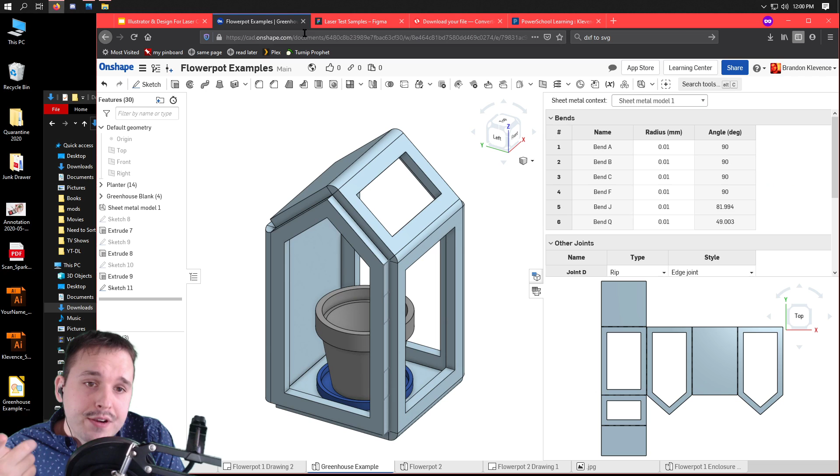Export your DXF or DWG and convert it. My first website that I used didn't work, but I'm going to check in on that. Convertio.co seemed to work just now.

And if I pop this back up here, what you should be able to do is once you have it imported, or you drag it in, you can ungroup it. Now let's see right here. You should start to see your actual line work, your actual drawing in there. And you want to go through and ungroup it again.

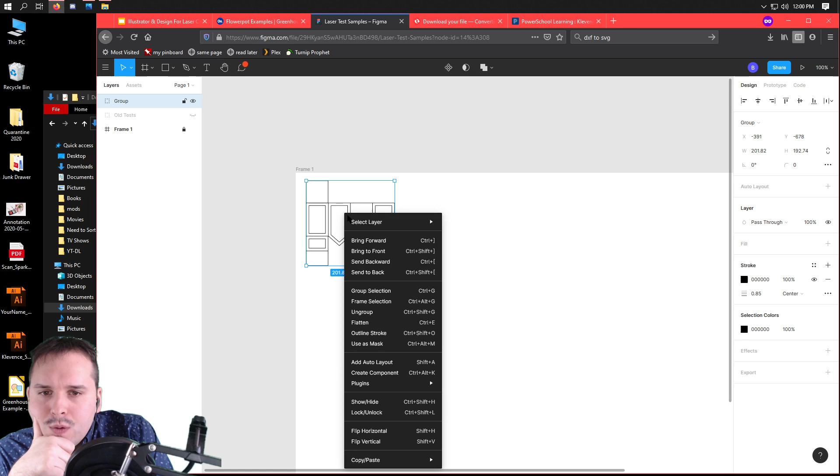You're going to get a bunch of vectors, but that is okay, because the way Figma works, and it worked beautifully the other day, I don't know why it's being a little bit temperamental today, is we can go through and select everything that we want to be in a certain layer.

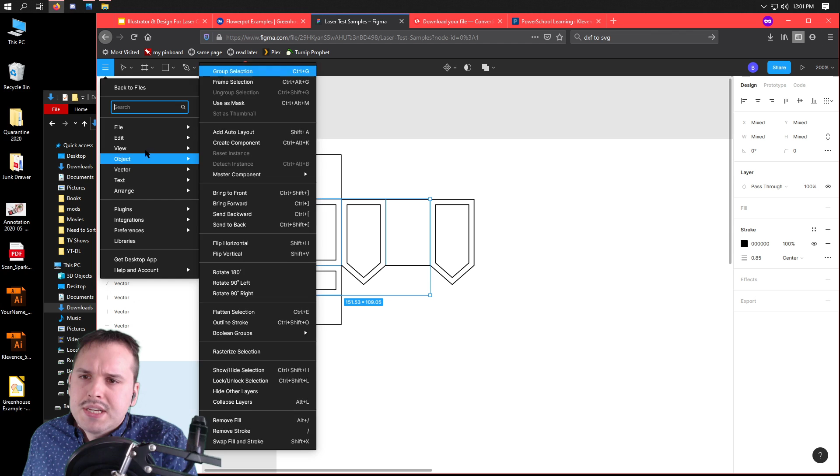And when I hold Control G, or if I go up here, it's probably Edit G or something like that, or Object G, Control G, I can group them. It'll group them together, and then I can rename that group as Engrave, and that's my Engrave layer.

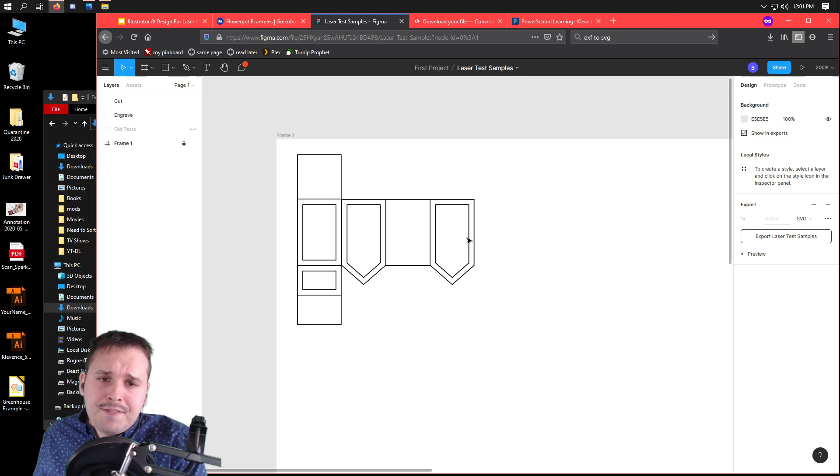Now what I can actually do is select all of these remaining vectors, Control G them, and I have my cut layer. So obviously Figma needs to work on a little bit more, but to be quite honest with you, when it works, it works quite well.

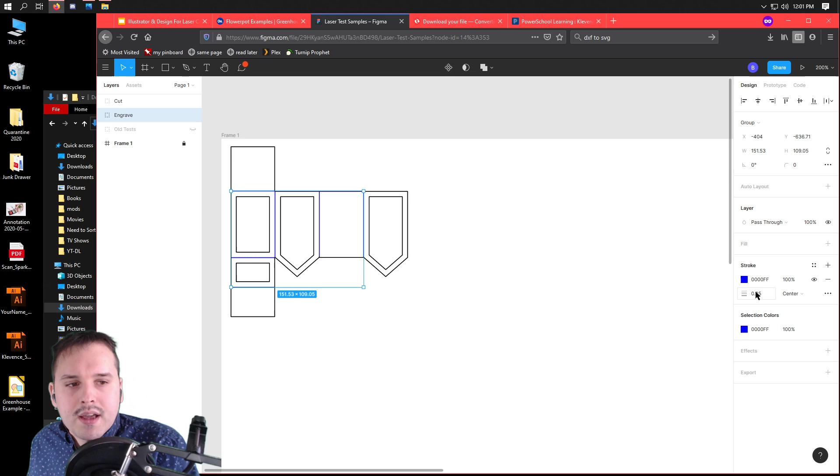I can go into Engrave right here, and I believe if I click this—the first one is RGB, so if I do two Fs here and hit enter, I got blue. If I go through here and I do 0.1, I have a blue line there, thin blue line.

And then if I click on cuts, RGB, so first two zeros, turn them to FF, and then 0.1, I have my laser cut drawing.

So I can export this as an SVG now, or you can actually just straight up share it with me, and it's done. What's also beautiful is once you share it with me, if you make it so I can edit, then I can actually work on this with you in real time.

So you would be able to see my cursor. We can comment on things. It's pretty sweet.

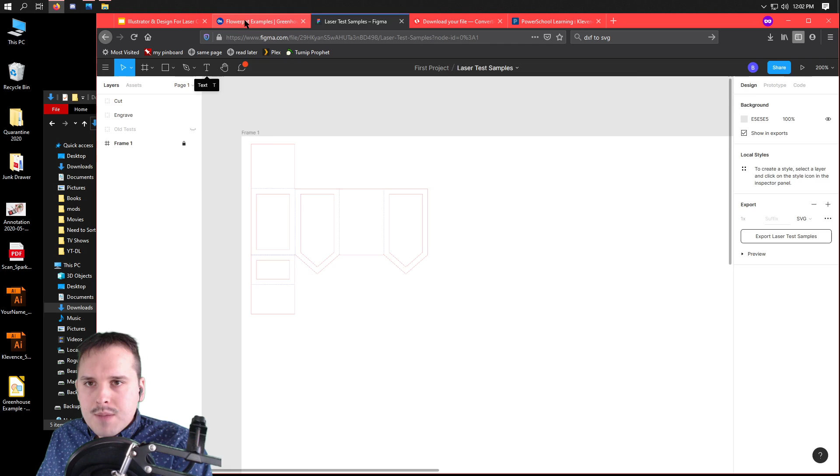Again, I've got to work on this a little bit more. Thank you for being patient with me, but Figma, I'm highly considering using it next year as long as we get a good track record with it. If you can help me by working with it now, that'd be great.

If you want to stick with Illustrator because it's easy and you already know it, fine, but you could see how easy Figma was when it worked. It looks like Convertio.co worked well for converting.